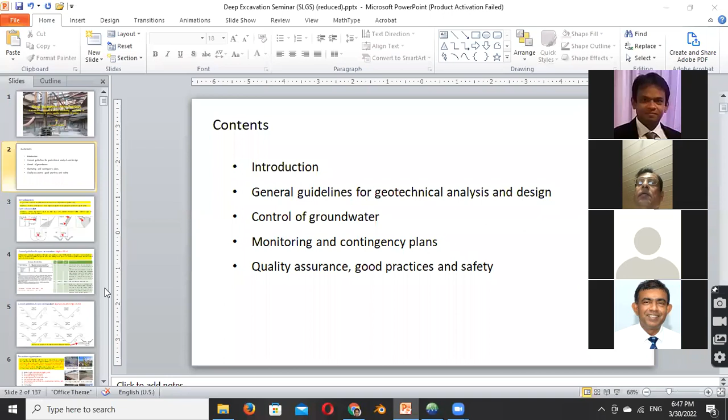Podium is for Dr. Nalin. Thank you, Mr. Sabandu, for your introduction. In the last lecture, I discussed the general guidelines for geotechnical analysis and design, and gave an introduction to the different systems available for deep excavation support. And today I'm going to discuss briefly how to control groundwater, the methods available for monitoring and the importance of monitoring. Let me quickly move - Nalin, can you go to full screen? Yeah sure, PowerPoint, this is just - okay right, I'll go.

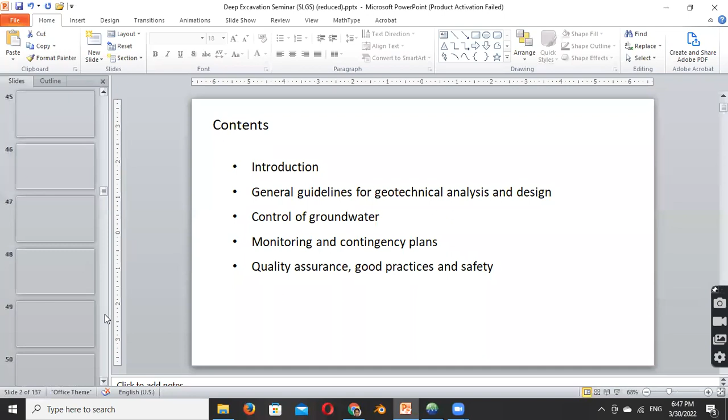Okay, I hope you all can see. So I would like to discuss the control of groundwater, and the methods available for the selection of groundwater control are presented in this figure.

Depending on the permeability, the equivalent permeability of the aquifer to be dewatered, different options are available for different expected drawdowns. This figure is readily applicable for open type excavations because we don't expect significant drawdown in supported or cut-off wall systems - there can be some small seepage plus water inside the excavation that has to be dewatered, but in open type excavation some drawdown is required to keep the excavation dry. So depending on the required amount of drawdown in meters and the permeability, we can think of different systems such as deep wells, well points, sumps and so on.

So in supported excavations, open sumps are very widely used because we don't need to achieve a significant drawdown. We simply need to dewater the water inside the excavation.

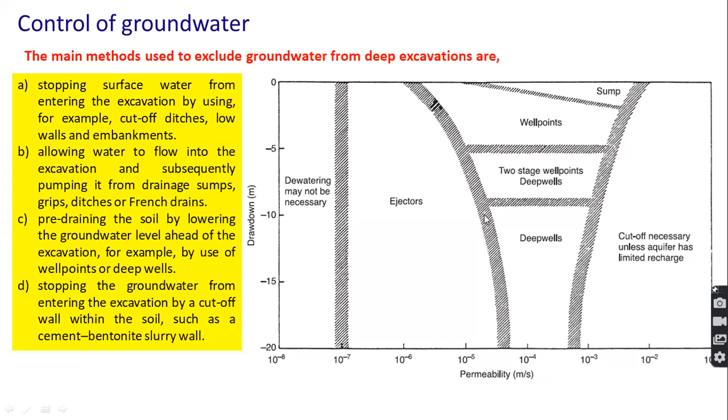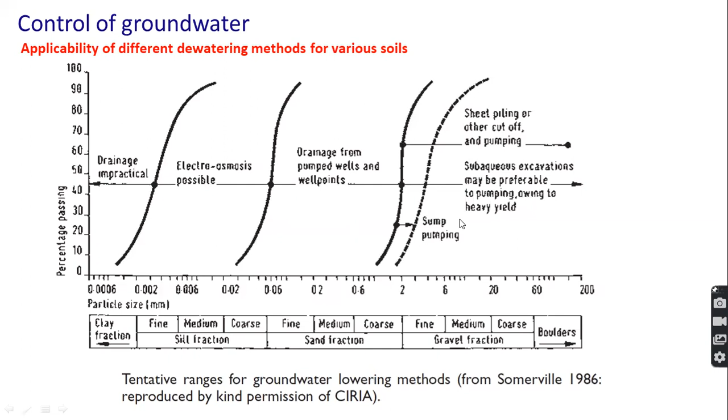This figure again gives the ranges of applicability of different methods as a particle size distribution analysis plot. So depending on how the particle size distribution plots and falls into the different envelopes, we can think of selecting appropriate methods for dewatering.

So one of the main design parameters is the coefficient of permeability of soil. Typical values are used in the absence of field test data, since most cases don't have field permeability tests done for deep excavations.

Porosity is important in calculating the amount of water to be dewatered inside the excavation, because below the water level there's some volume of water to be excavated. So porosity is a very useful parameter. For example, a porosity of about 0.35 to 0.4 is used in the dewatering analysis, meaning if you consider the total volume below the groundwater table, about 35% to 40% of it is water.

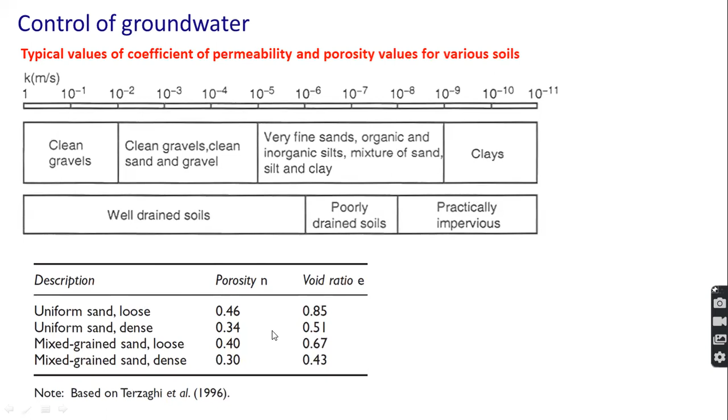That amount has to be dewatered from the excavation. The rate of dewatering and the size of the pumps, all these parameters can be calculated based on this. In addition to the volume of water inside the excavation, there will be some seepage from the surrounding area.

The dewatering analysis can be carried out in two different ways: predefined designs using analytical methods, graphical methods such as flow nets, which are widely used, and then there are numerical methods.

Some typical examples are shown here. The numerical methods include spreadsheet-based finite difference programs, and finite element packages are also available for dewatering analysis. Whatever you do, because groundwater flow analysis is very much dependent on the coefficient of permeability of the aquifer, the equivalent coefficient of permeability, no matter how accurate or advanced your analysis is, it has to be coupled with the observational approach, and parameters have to be adjusted based on observational records. That I have to emphasize.

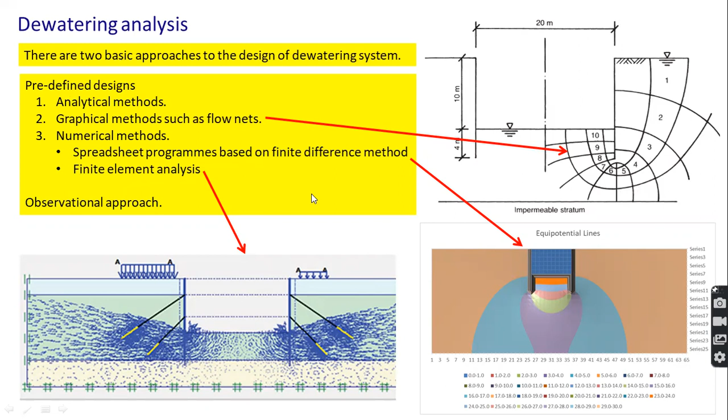So I would like to quickly go through some available groundwater control systems.

Sump pumping is the most widely used dewatering system for deep excavations. It's very effective and economical, and can achieve a modest drawdown of about 2 meters maximum. If we are dewatering inside an excavation, we don't need a large drawdown, so this is the most appropriate method in such cases.

Some typical arrangements for sump pumping are shown here. You can have a perforated barrel covered with filter media, and inside you have a submersible pump to take water out. In some cases, for large scale dewatering, concrete cylinders can also be used, as typically shown here.

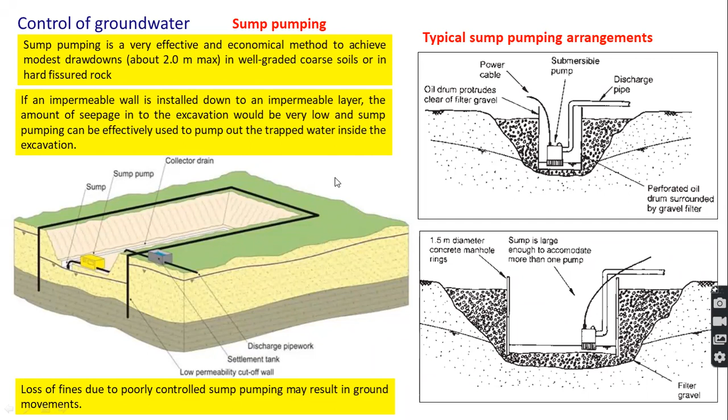Then comes well points. With well points, we can achieve a drawdown of about 5-6 meters, and they are widely used in open type excavations or trench excavations. They are not widely used in deep excavations supported by retaining walls.

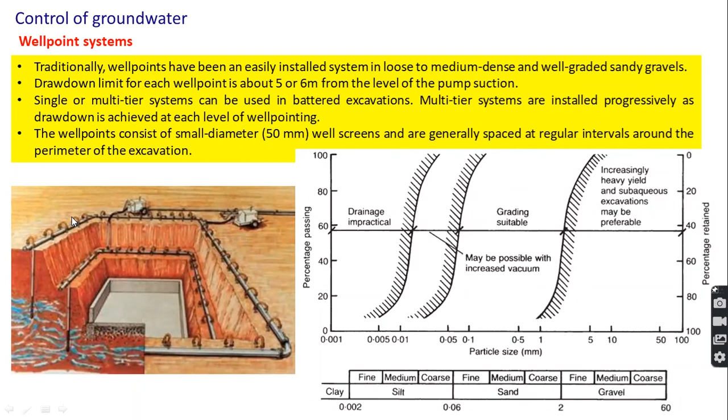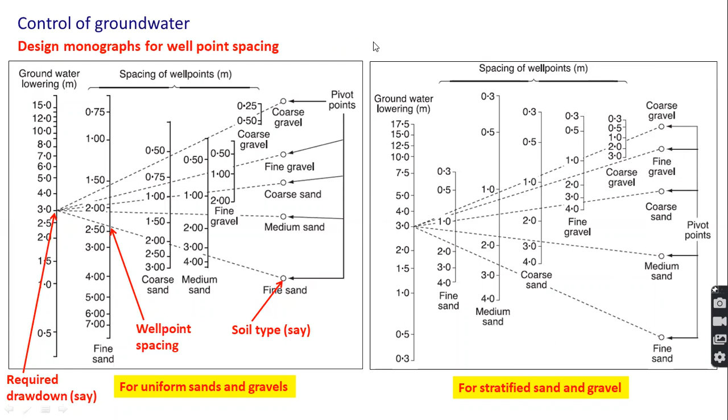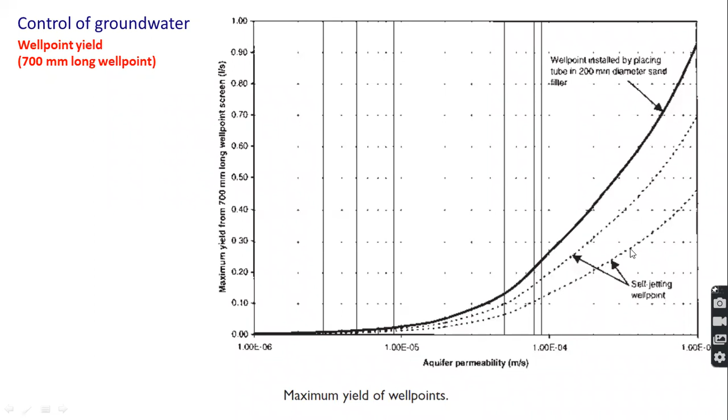The yield of a well point from a single well point having a length of 700 millimeters is given here. So it's just for information.

And then comes deep wells. Deep wells are widely used to dewater from outside the deep excavations. So if there are no structures around, dewatering from outside can be considered.

Deep wells can be used to achieve a significant amount of drawdown, the depth of more than 10 meters. Drawdowns more than 10 meters can be achieved through deep wells, and the depth of the deep well can vary from 10 to 35 meters, even deeper ones are also available.

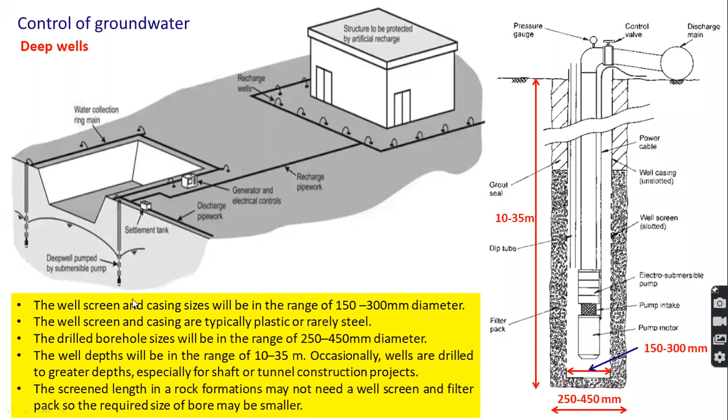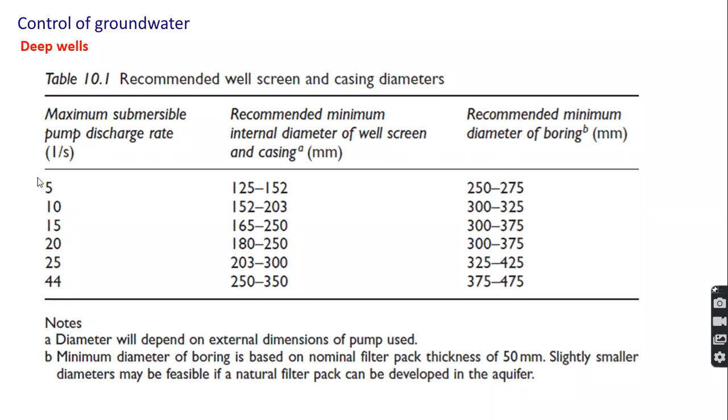Some typical pump discharge rates, the recommended minimum internal diameter of the casing, and the borehole diameters depending on the discharge rate are given here, and you can use this in selecting the appropriate dimensions for the deep well. So I am not going to spend a lot of time on these.

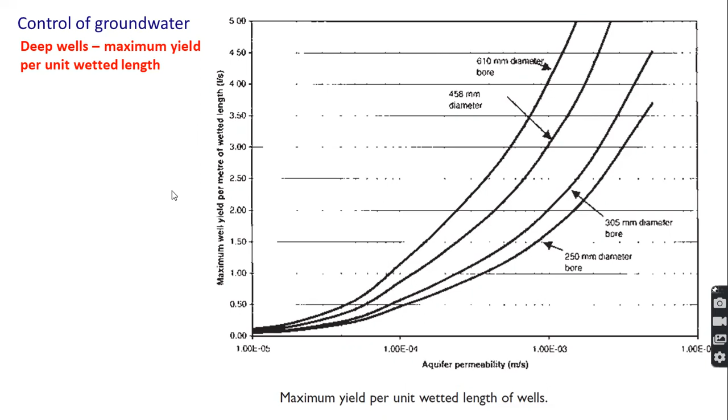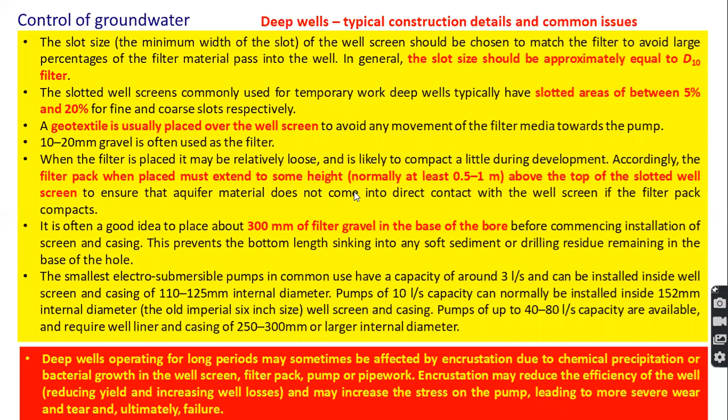So in addition to the ejectors, there are some other methods available like horizontal well pointing, pressure relief wells. Pressure relief wells are like sand drains, I'll show you some figures. Then comes collector wells, they are not used, very rarely used in deep excavation systems. Then electro osmosis is also very rarely used in deep excavation. It is more like a ground improvement method than a dewatering method. But electro osmosis also can be used to dewater from very fine soils like clay type soils.

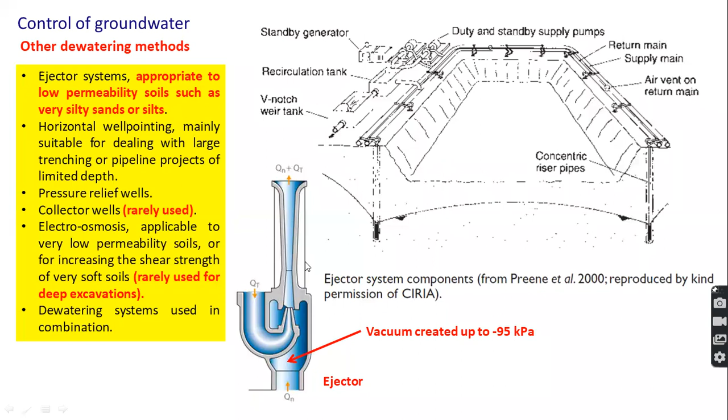So in some cases, the given dewatering systems are used in combination as well. Pressure relief wells, as I told you, are like sand drains or gravel drains.

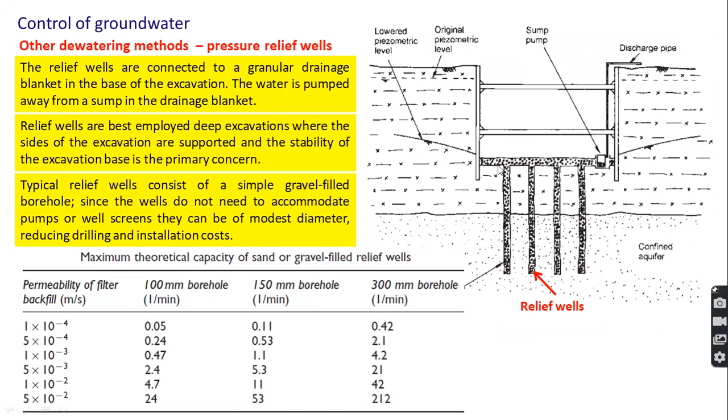Then I quickly go through this pressure relief wells. Sorry, this is a collector well. It's a large diameter well, so this is actually not used as a dewatering system. These kinds of systems are used to create water supply wells. This is like a large diameter caisson and horizontal wells are installed around the caisson.

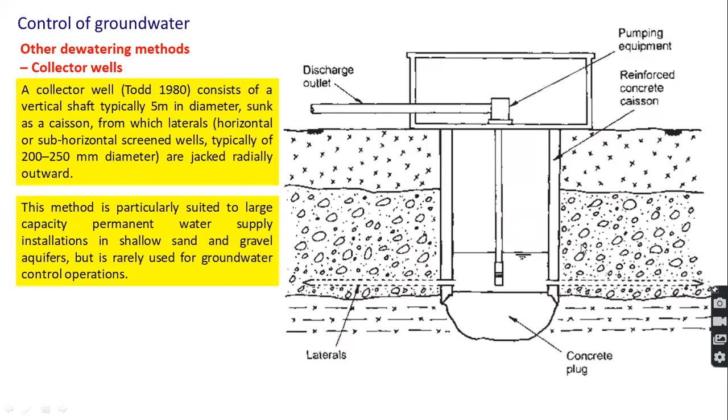Then the electro osmosis, as I told you, it's rarely used as a dewatering method, it's more like a ground improvement technique. So there we have a cathode and an anode. You can see a cross section taken through the cathode and anode. There are metal strips, copper is used, and a power supply is given. So the water particles are attracted to the cathode and it can be pumped out using a perforated pipe.

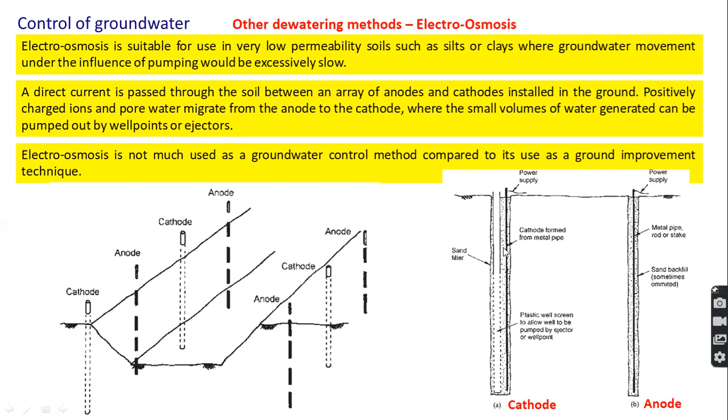So the effects of dewatering have to be carefully considered. There can be settlement resulting from the instability of excavation, ground settlement due to loss of fines due to dewatering, and ground settlement induced by the increase in effective stress due to dewatering. The drawdown of the water table causes the increase of effective stress that can create settlements. And there are other, less important effects.

From the geotechnical point of view, the other effects are depletion of groundwater sources, changes in groundwater quality, and environmental related issues. The ground settlement induced by the increase in effective stress can be calculated using an equation.

This equation uses the coefficient of volume compressibility of the subsurface. Delta U is the effective stress increase, or the pore water pressure change due to the drawdown of the water table. H is the thickness of the compressible layer. So this can be used to approximate the ground settlement induced by the drawdown of the water table.

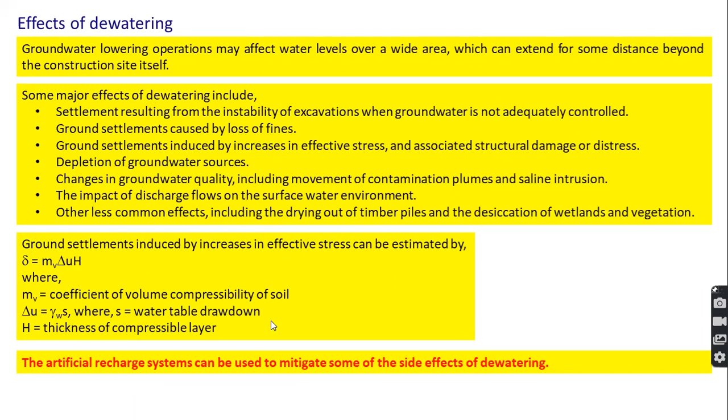If this settlement is significant, we have to consider recharging of the groundwater table. Some recharging options are shown here. There are a large number of recharging options, but for deep excavations, recharging wells and recharging pits are widely used, so I would like to only discuss these two methods.

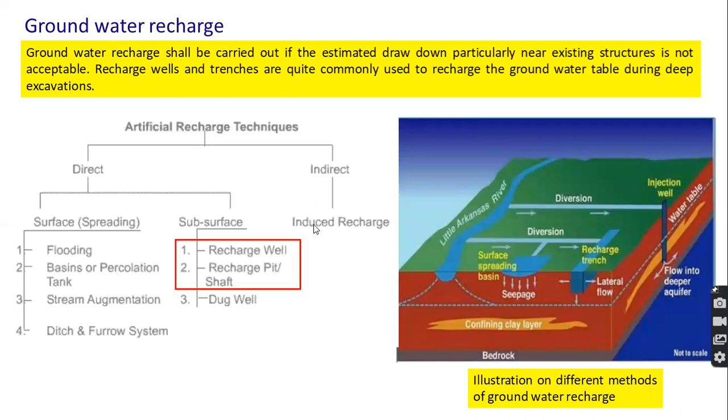On the left hand side, a trench is used for groundwater recharging. On the other side a well is used, more like an observation well. If the trench is not there, the groundwater table would drop where pumping is taking place, something like this. This drawdown is recovered to some extent due to the presence of the recharge trench.

This is the recharge well, again very similar to the observation well. You have a well screen, and this is the down spout where you pump water into the recharge well.

Sometimes this is done under pressure, but we have to be very careful when recharging the groundwater table under pressure or injecting water, because it might affect the stability of the excavation support system. It increases the pore water pressure behind the retaining wall, and can cause distress on the retaining wall. So we have to be very careful, and over recharging is not recommended at all.

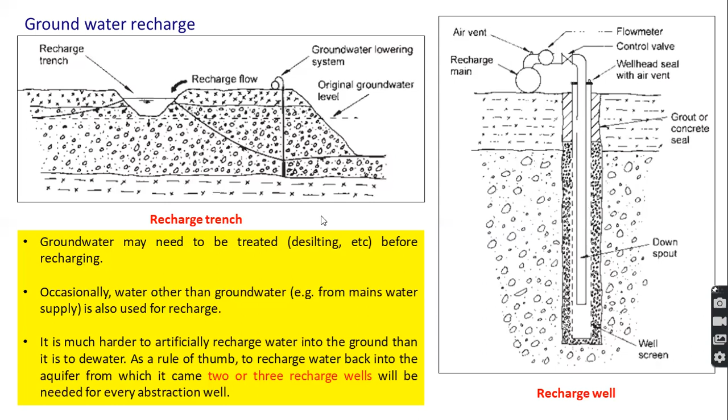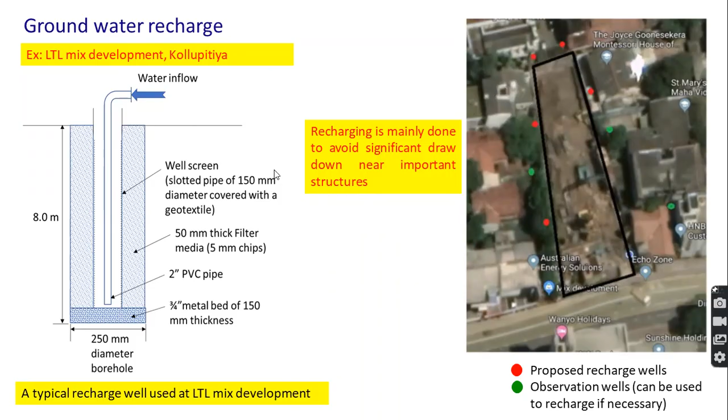There are some issues related to groundwater recharge, and I'm not going to go into detail. Mainly, aeration can cause gas binding, so we have to prevent the aeration of water. Again, if the water contains sediments or iron, it can significantly affect the efficiency of the recharging operation, so recharge wells are susceptible to clogging.

Recharge wells are more susceptible to clogging compared to dewatering wells, so frequent cleaning of the recharge wells is required. In some cases, it's recommended to clean the recharge wells once a month using airlifting techniques, to remove the debris and suspended solids at the bottom of the recharge wells.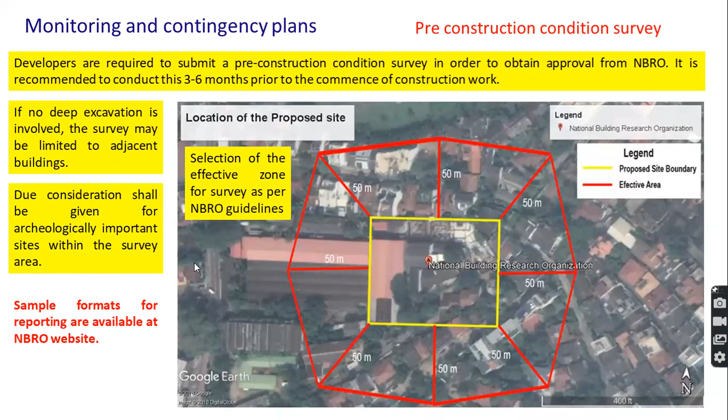Different methods are available for monitoring. I'm not going to talk about the existing condition survey, but about monitoring of the deep excavation. Water level, deformation, strut forces, and ground heave are the parameters to be measured. There are a large number of monitoring instruments available, and the methods enclosed in red color are the ones widely used in Sri Lanka.

If I explain a few of them: settlement of ground surface and deformation of the wall are measured using surveying methods, which are widely used. Then plumb lines are installed along the wall to measure any inclination of the wall, and inclinometers are widely used in deep excavations in Sri Lanka.

Subsurface settlement points are sometimes used. Piezometers and probes are used for water pressure measurement and water level measurements in observation wells. Crack gauges are used to measure cracks in existing structures surrounding the excavation. In some very deep and important excavations, differential strain gauges and load cells are installed to measure the prop forces.

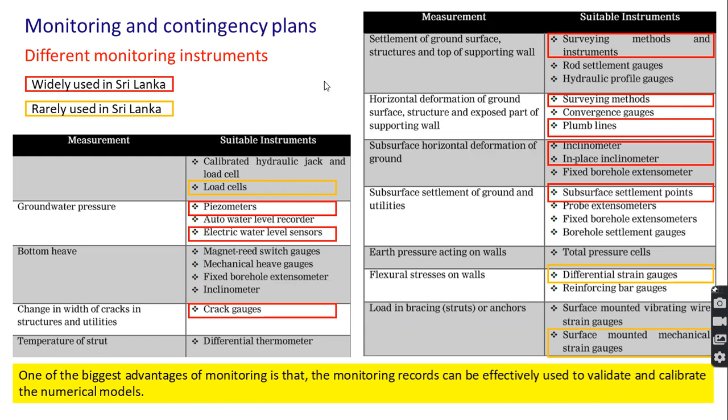So some instrumentation is shown here. I will show you some larger schematic diagrams in the coming figures. So basically we have extensometers, inclinometers, strain gauges, load cells, and so on.

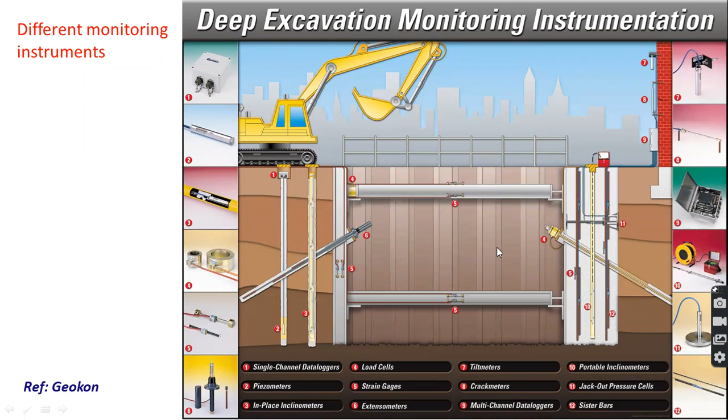This is a typical ground settlement marker. You can see on the left hand side, it's a 16 millimeter bar driven to a depth of about 1 meter or more, covered with a concrete cap at the top. This can be used to measure the ground settlement.

On the right hand side, a typical heave gauge is shown, which is used to measure the ground heave during excavations. This enlarged part is installed below the excavation surface, at the final excavation level. Below 150 centimeters you have to install this enlarged section, and from the top you can take survey readings to measure the ground heave.

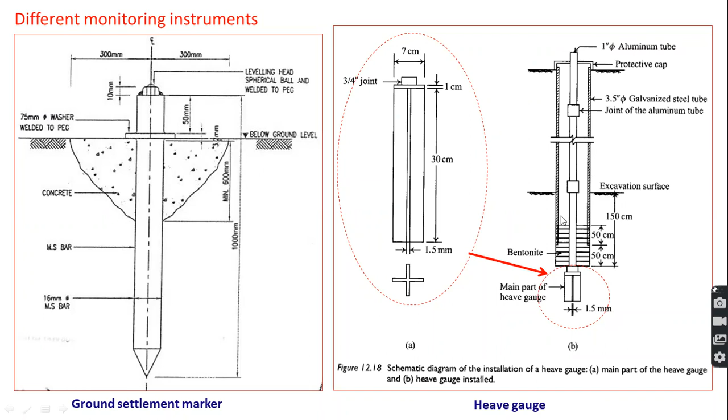Then comes extensometers. There are large varieties of extensometers, and a lot of patented products are also available. In the simplest type, known as the fixed borehole type extensometer, we measure the extension of a wire fixed to the bottom of the borehole. If there is movement along the borehole, the wire will be extended, and that extension is monitored.

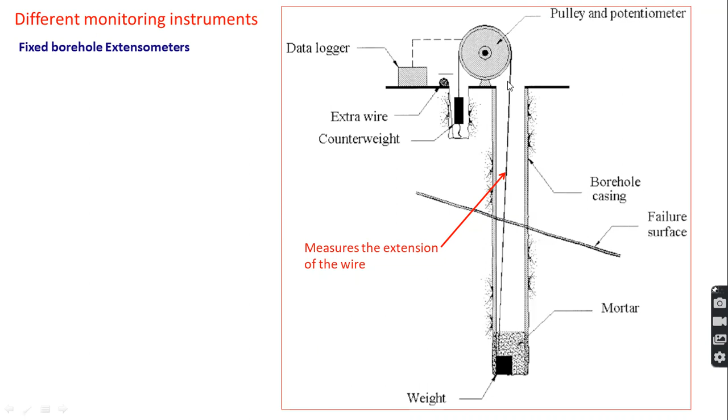These are some modern type extensometers known as magnetic extensometers. They are installed along the borehole, and you can install them at different depths. A sensor sensitive to the magnets of the extensometers, called the probe, is lowered. When it detects the magnet, we can identify the location of the spider magnet. By monitoring the location, we can get an idea about the movement of the ground.

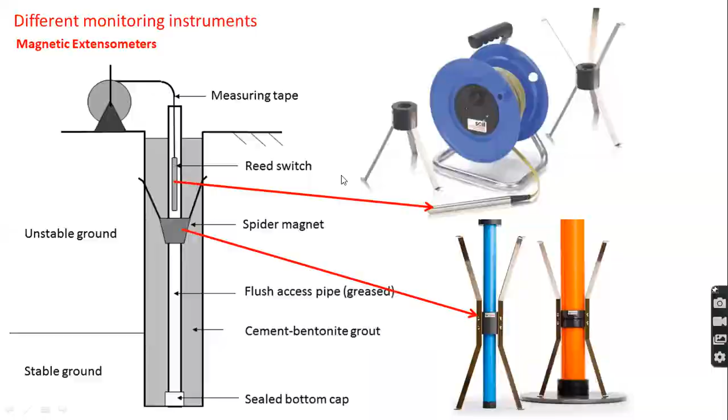Then some photos of the installation of load cells to measure the prop forces and strain gauges are shown here. You can see some vibrating wire type strain gauges fixed to the steel I-section, and in this case the load cells are placed at the joint between two I-sections to directly measure the prop force. The strain gauges measure the strain, and by using Hooke's law, the strain can be converted to stress.

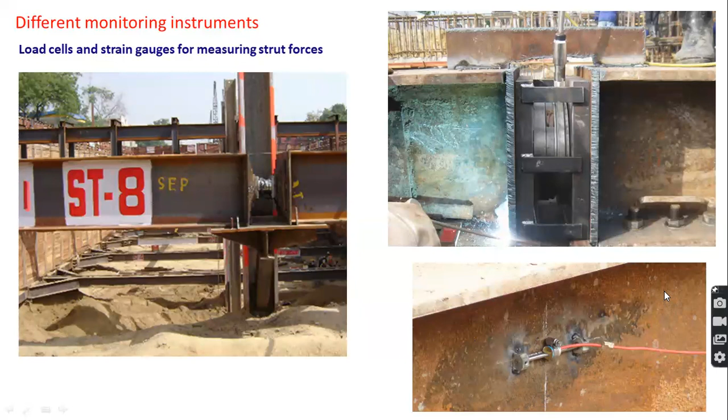The monitoring frequency guidelines are general, but the frequency of reading should be related to the construction activity. If construction works are going slowly, you don't have to take very frequent monitoring readings. It has to be related to the rate at which the readings are changing. If the readings are changing frequently, we have to take more readings to capture the behavior. Too many readings overload the processing and interpretation capacity, whereas too few may cause important events to be missed and prevent timely actions from being taken.

This is very important. It is generally required to carry out a few sets of initial readings to establish a reliable datum. Then it is always recommended to take readings after some disturbance, like a blast, heavy rain, or an earthquake.

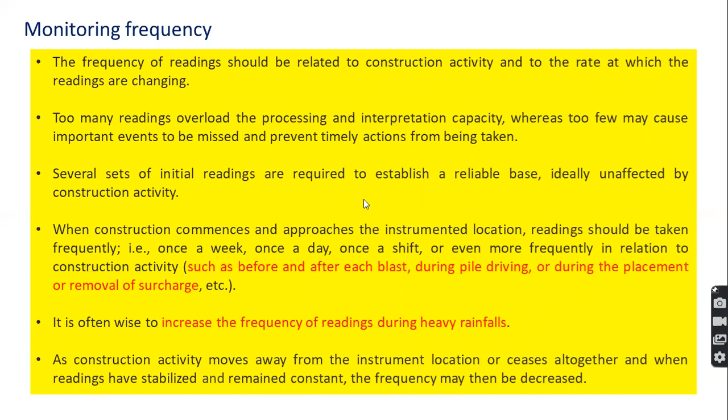Some general guidelines for selecting the monitoring frequency are shown here. A benchmark is where you take readings to compare with your other readings. It is recommended to check the location and coordinates of the benchmark every 3 months during a deep excavation.

All the other monitoring records, like settlements, inclinometer readings, observation well readings, and so on, are recommended to be taken once a week in general. As I mentioned, if some significant disturbance took place, like heavy rain or an earthquake, it's better to take readings immediately after the event.

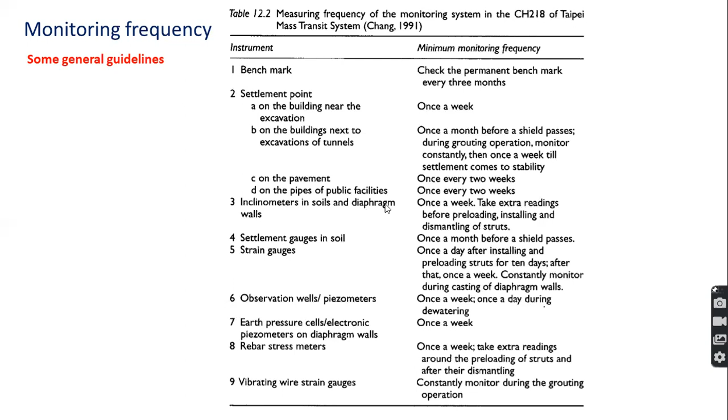In general, inclinometers should be installed at the location where the maximum wall deflection is expected. The observation wells can be used for recharging as well, so we have to install them close to existing structures, because the effect of dewatering can be very significant on the existing structures.

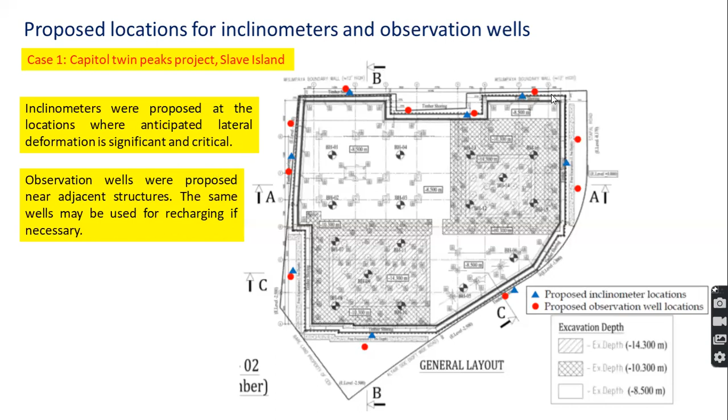As a general recommendation, install the inclinometers at the places where maximum deflection is expected, and it's better to install the observation wells close to existing structures. The inclinometers can be installed either through the wall or outside the wall.

It's recommended to fix the inclinometer to a fixed point like rock or very hard strata. If hard strata is not available up to a significant depth, you have to go to a depth where no lateral deformation is expected, and from there you terminate the inclinometer.

If the inclinometers are installed outside the existing wall, it is generally recommended to maintain a distance less than 2 meters. Measuring the wall deformation far away from the wall does not have a lot of use.

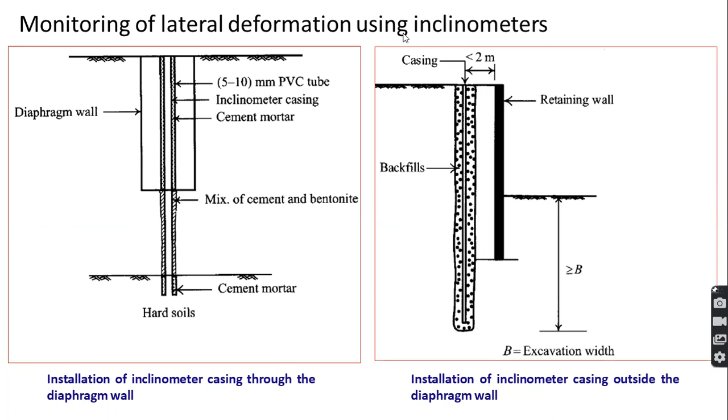This is a typical inclinometer casing and the inclinometer, and the working principle is very simple. It measures the inclination of the rod, and the length of the rod is fixed. If you know the inclination and the length, you can measure the lateral deformation using simple trigonometry. This is how the inclinometer casing is installed through a diaphragm wall, for example.

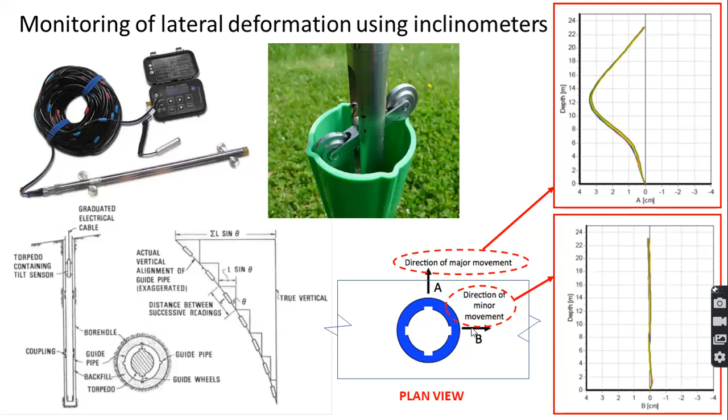When we insert the inclinometer in this direction, you can get the variation of the deformation in the major direction, and by inserting the inclinometer in the perpendicular direction, we can get the movement in the longitudinal direction. You can see two typical records. In this direction we don't expect a lot of deformation because the wall is quite stiff in this direction.

Isolated regular monitoring records are of not much use. I have seen in many deep excavation projects, they take monitoring records just for the sake of taking them, and isolated individual readings are available, which are very difficult to interpret. So you have to plot the variation with time, and the trend has to be carefully monitored. The person who takes this reading has to be trained on identifying these trends, and immediately communicate them to the relevant people for taking actions.

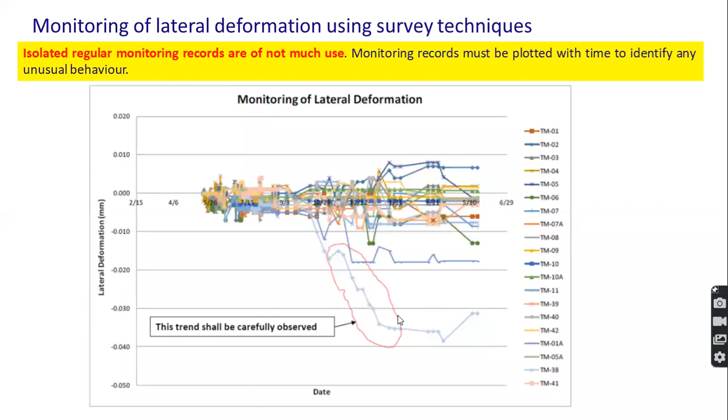For example, you can see this typical lateral deformation survey measurement plotted against time, and you can see in one location some abnormal behavior is recorded. We have to carefully observe this, where it takes place, see what is wrong, and take the appropriate remedial measures.

This is again the settlement with time. So you can see some trend, an increasing trend. This has to be carefully observed.

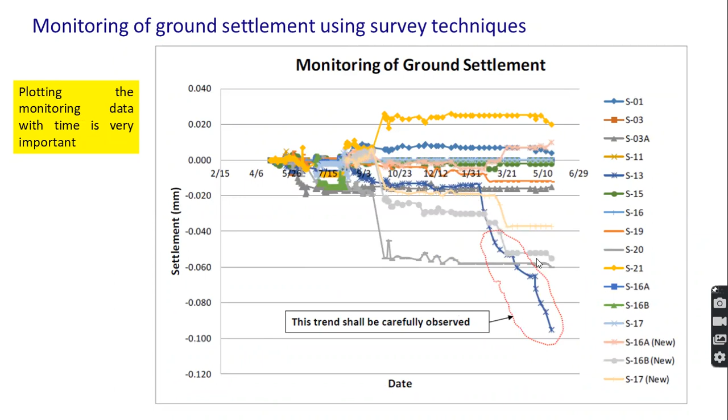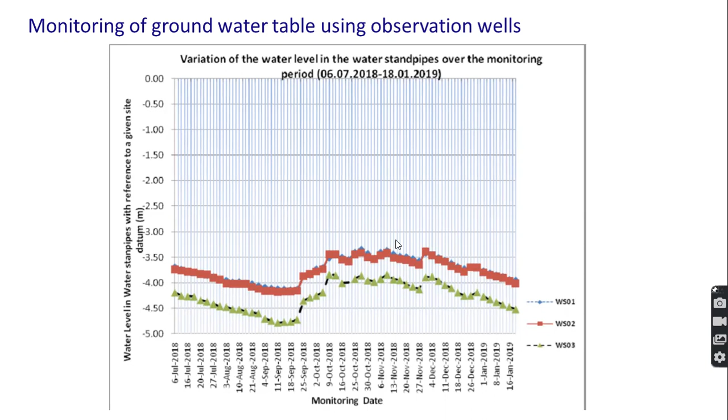Then I would like to discuss the maximum allowable wall deflection limits. I took these two figures from the Singapore guidelines, Building and Construction Authority Singapore. You can see that according to this guideline...

The retained site is divided into 3 zones depending on the distance from the edge of the wall, x. Zone 1 is where x over h is less than 1, meaning this distance x is less than or equal to the excavation depth. Zone 2 is where the x over h ratio equals 1 to 2, and then zone 3.

If you have important structures to be protected in zone 1, the maximum allowable deflection limit is 0.5% according to this guideline. If you have structures within zone 2, but none in zone 1, the guideline is a bit relaxed, 0.7% - you can go up to 0.7% of the excavation depth h as the maximum allowable wall deflection.

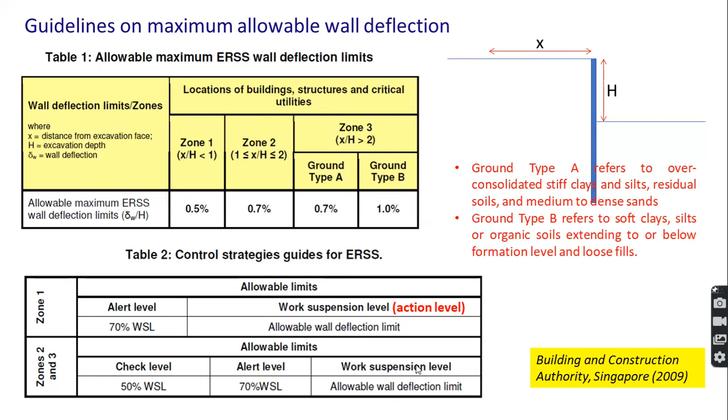And in zone 2 and 3, again some alert levels, check level, alert level, and work suspension levels are defined according to this.

Then I would like to quickly go through the allowable settlements, building settlements. Depending on the amount of settlement, we can categorize them as negligible or severe, and the expected structural damage. Some guidelines are given.

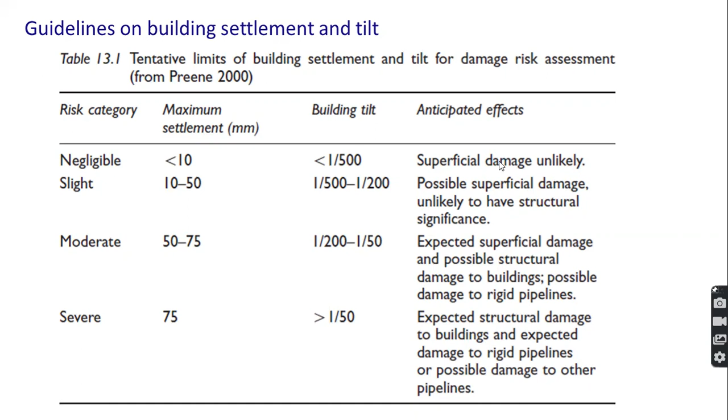Then about the angular distortion of structures - 1:500 is the safe limit for buildings where cracking is not permissible. If the angular distortion is more than that, some cracks may appear on existing structures.

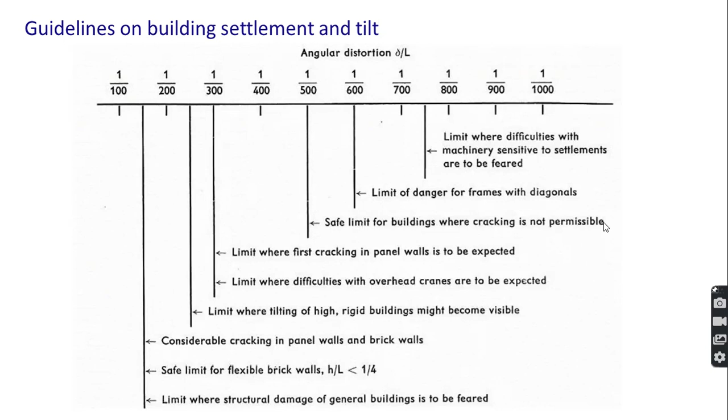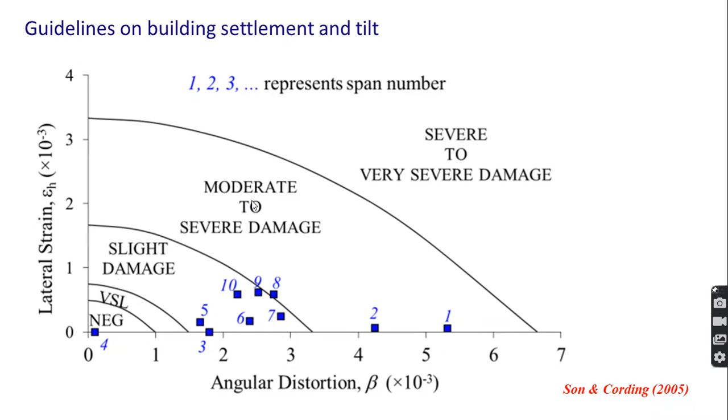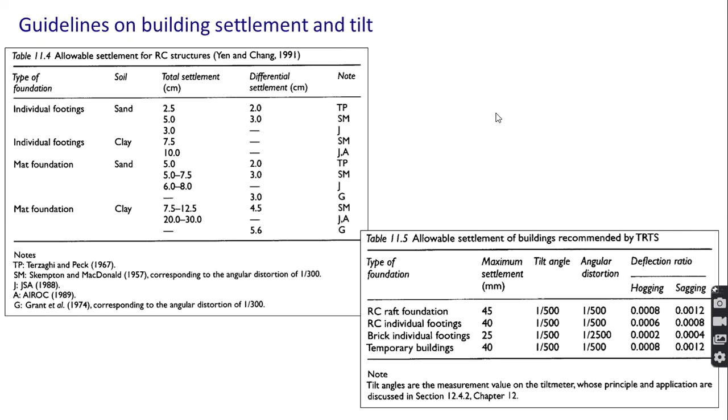I am not going to explain this in detail, because this is about the allowable settlement of RC structures, individual footings, mat footings, and so on.

Then I would like to discuss the contingency plans - what should we do if things are not happening as expected? According to the NBRO requirements, any contractor planning to carry out a deep excavation has to submit contingency plans in their report. These aspects have to be considered, including excessive lateral movement of the wall and ground settlement.

If the lateral movement and the settlement is about to exceed the action level, what can we do? We have to increase the number of lateral supports to reduce the unsupported length of the wall. In general, you have to increase the stiffness of the lateral support system.

Leaking through the wall can be extremely dangerous, particularly in situations where the subsurface is sandy and water table is high, because particles will be lost in no time, and large ground depressions can occur on the retained side. So immediate actions have to be taken.

In the contingency plan, we have to immediately stop the further excavation, try to block the leak using sandbags, straw, textile, fabric, and try to manage or reduce the flow. Once the leak is stabilized, you have to stop the fines coming out from the hole.

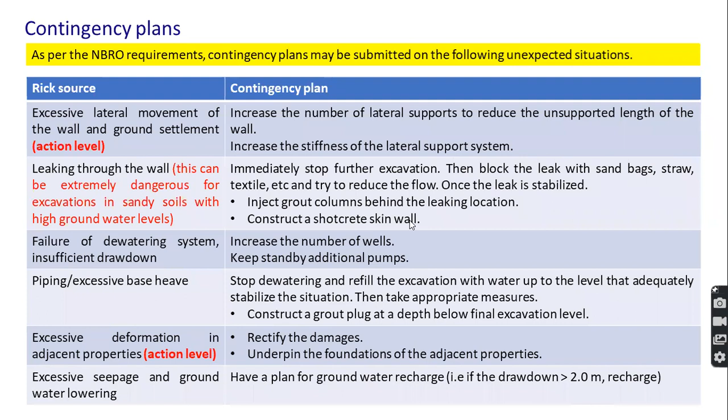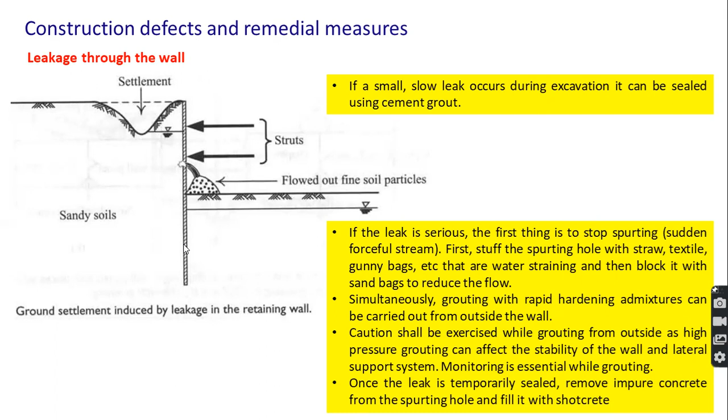So this is a schematic diagram on how to address a leak through the wall. I have already explained this, so I'm not going to spend time on it.

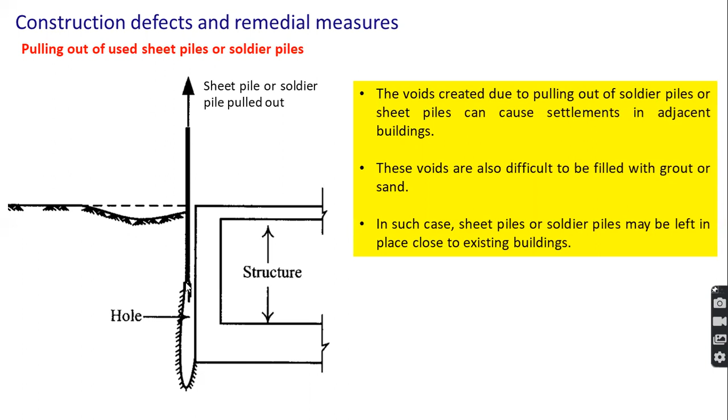There can be issues in pulling out the sheet piles. In some cases, it creates a hole which is difficult to be grouted, and if there are important structures on the retained side to be protected, we have to think of keeping the sheet piles in place permanently near the existing structures. Otherwise the pulling out of long sheet piles can create a lot of ground subsidence.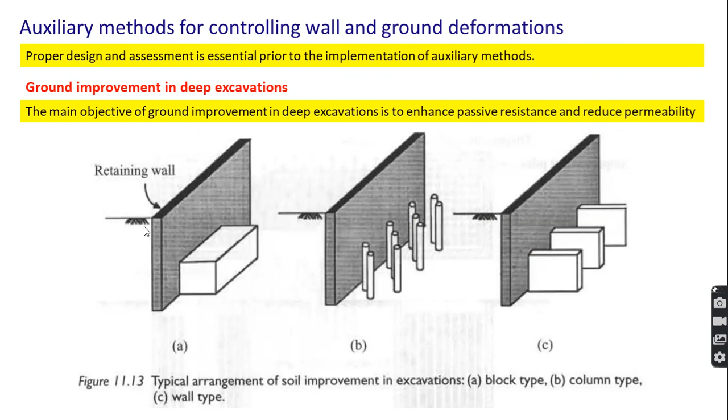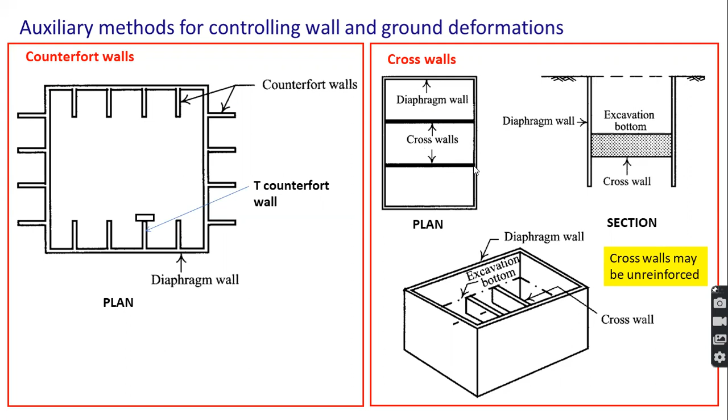Some other auxiliary methods are also explained here. Creating counterfort walls below the excavation level can reduce the wall deformation. Then cross walls - this is like a kind of soil strut. Reinforced or unreinforced, cement mixed or jet grouted cross walls can be constructed below the bottom of the excavations to stiffen and reduce the wall deflection.

Underpinning has to be done in extreme cases if there are important structures and excessive settlement is observed. We have to transfer the loads of the existing building foundations to either piles or some other support system. So that is called underpinning.

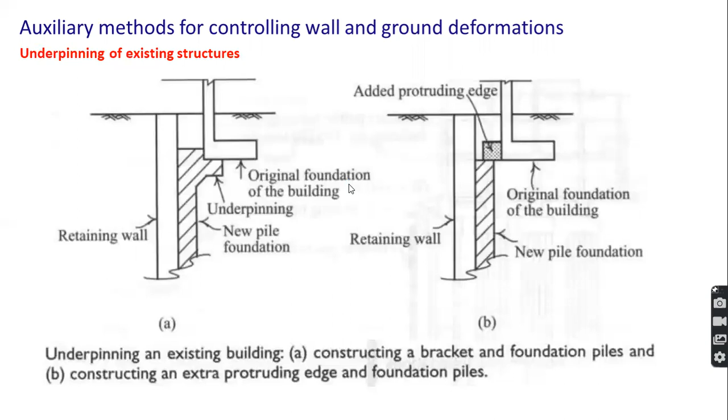Finally, I would like to discuss the quality assurance good practices. It's better if this kind of practice can come from some regulatory body, but I have not seen this kind of very detailed quality assurance practices in deep excavation projects in Sri Lanka.

So this is like a responsibility matrix for deep excavations. You can see different activities and items, where R means responsible person, A is the authorized person, CE is the chief engineer, PE is the project engineer, and so on. So you can see the persons involved in the project, and their responsibilities are well defined in this kind of matrix.

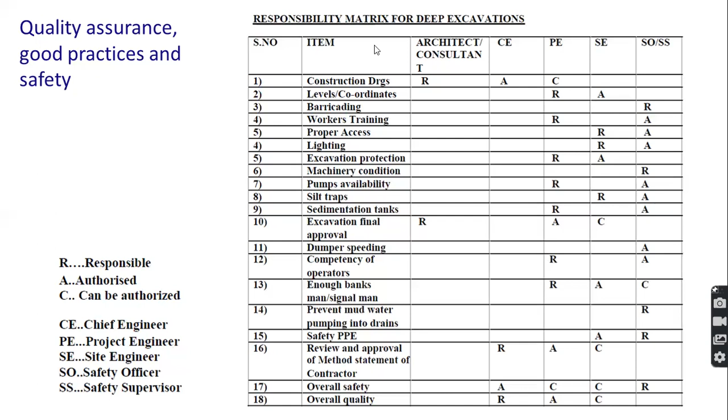The risk analysis - different types of risks during deep excavation, and the risk levels have been analyzed and risk control measures have been defined. So the people involved in this kind of deep excavation have to be trained on the risks, the severity of the risk, and the risk control measures.

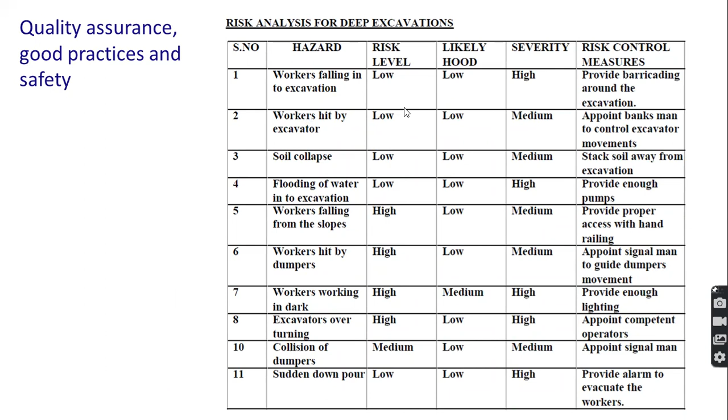Some safety measures are shown here. I am not going to explain this in detail.

One important thing is we have to stack the excavated soil away from the edge of the excavation to prevent collapse of soil, and it creates a lot of other issues. It creates a surcharge on the excavation site. One meter of loose soil can create a surcharge of about 15 to 20 kilopascals. So if you have about a 3 meter heap of soil, it creates a surcharge of about 45-60 kilopascals. If the wall excavation support system is not designed to sustain such loads, there can be a lot of problems. And if it rains, the excavated soil absorbs water and the weight goes up, and the problems can be severe.

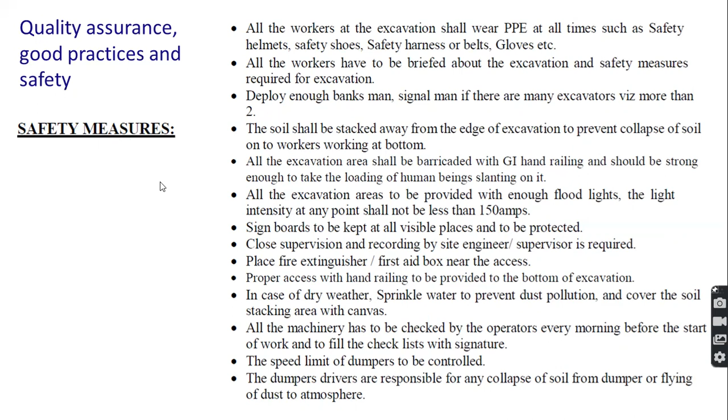Then some safety checklists for deep excavations. This is a very general safety checklist, showing how to see whether these are in place, and the signature of the engineer has to be taken before the start of the work on each day.

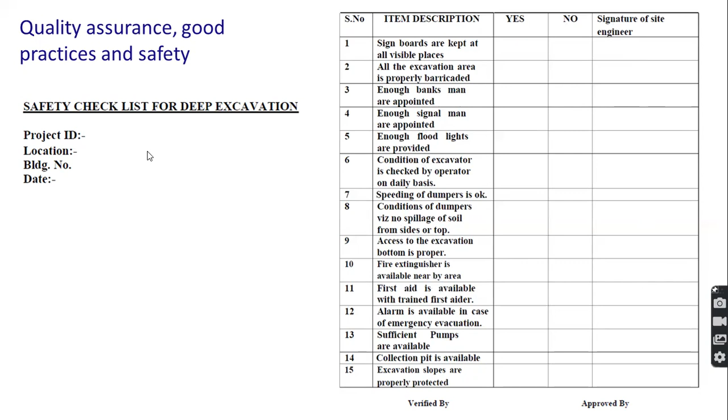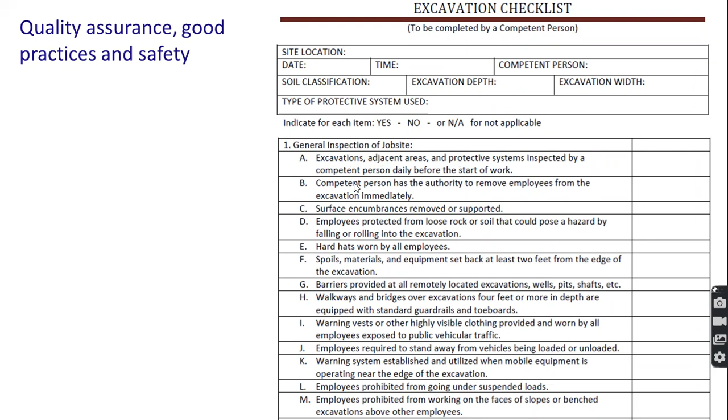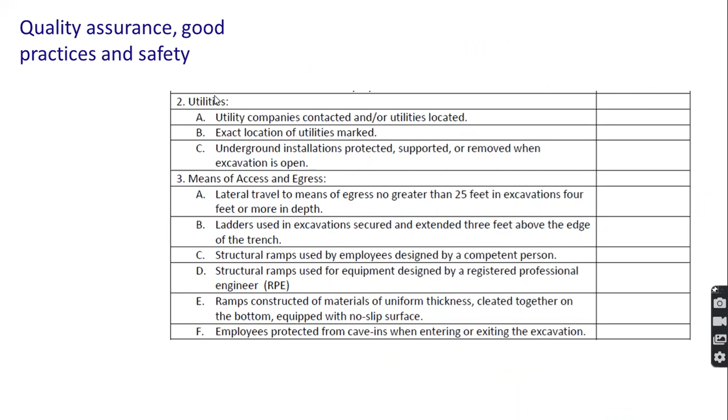A more detailed excavation checklist is shown here. You can see the activities are categorized into general inspection of the job site, with different checks to be done. Then utilities - someone has to look at whether they are protected, supported, removed, and so on. Then means of access and egress, wet conditions, hazardous atmosphere - different checks to be made.

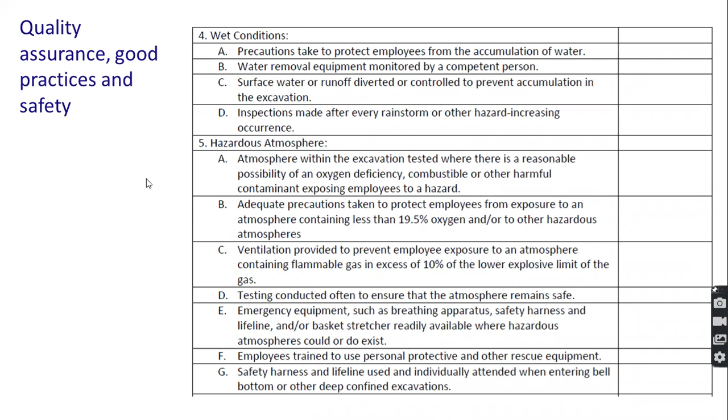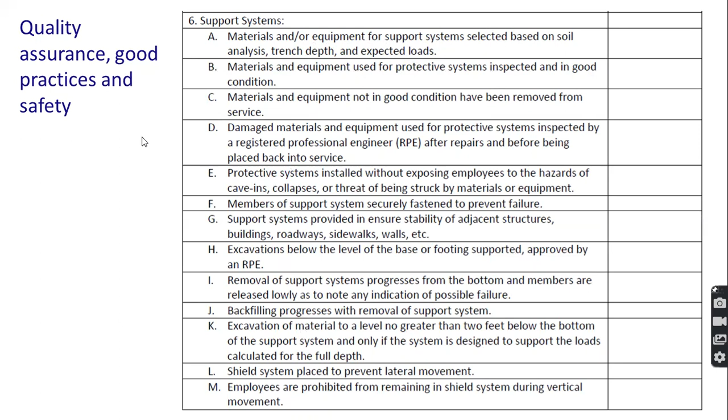Then comes the support system. The materials and equipment for the support system are based on soil analysis, trench depth, and expected loads. Someone has to check this, that they are in good condition and so on. So a lot of checks to be done on the support system.